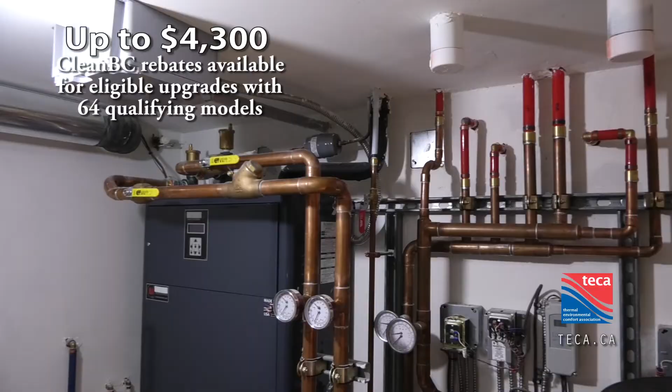Let's talk about money. Everyone likes money. Right off the bat, there are rebates available today for air-to-water heat pumps. In retrofit applications, CleanBC has rebates available. As of March 2021, there are 64 qualifying models here in BC that are eligible for rebates. So I know that's a big selling feature for heat pumps, and it applies to air-to-water as well.

So let's talk about hydronics. What is hydronics? Hydronics is heating with hot water. Hot water is the conveyor belt of heat. Why do we use hydronics? Distribution efficiency, ultimately. When it comes down to it, we can move more heat with water than we can with air, and we can move that heat further and more efficiently in smaller spaces. So builders love it - less bulkheads, smaller pipes delivering the same amount of heat as large ducts.

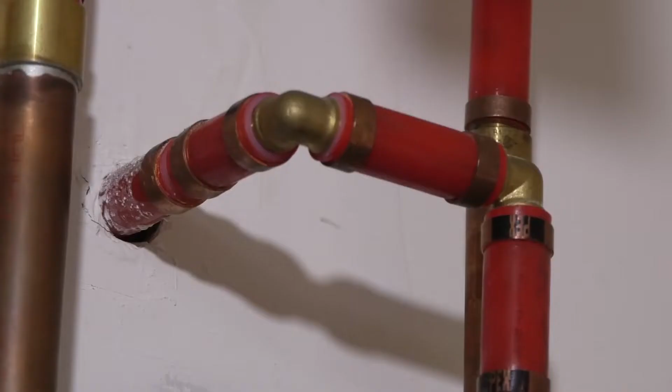Again, hydronic radiant floor heating - that's the predominant way we heat here with hydronics. It's a great match to air-to-water heat pumps.

It matches human comfort profile. We're talking about warm feet, cool head, optimal human comfort. You heat a bunch of air, it goes up and hangs out on the ceiling. I only know one guy who wrote a song about dancing on the ceiling - everyone else is down here. We keep the heat where it needs to be. We can be comfortable when the objects in the room are warm, even at a lower air temperature.

On top of that, hydronics is flexible. We have all types of different heat emitters. Radiant floor isn't where it ends - we've got radiant walls, radiant ceilings, radiators, fan coils, baseboards, and then other loads like domestic hot water. I'm sure some of you shower, so that's very essential. Then we have snow melt, hot tubs, pools - all these other fun things we can do with hydronics. So it's very scalable, and we can stage different types of heat sources very well into the same distribution systems, whether that's different fuel types or just multiple appliances to deal with different loads.

Radiant floor is virtually silent, very, very popular thing. But I'm not here to sell you on radiant - it's already happening, it's everywhere. But a key difference with air-to-water heat pumps is temperature control. If I can drill one thing home tonight, it's about delivered water temperatures and their effect on capacity and efficiency in a heat pump.

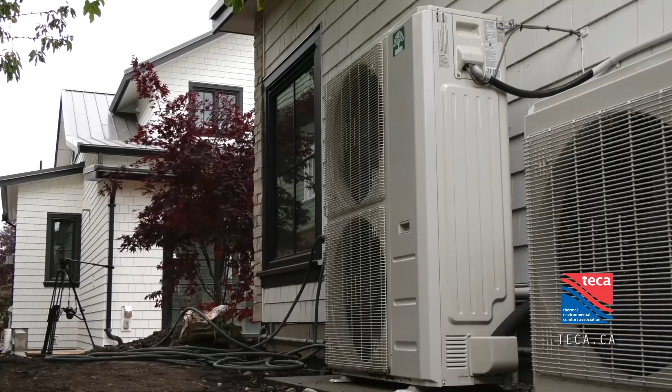We can heat with very low temperatures with radiant floor heating, much lower than anyone would be comfortable with if that was the air temperature coming out of a forced air system. So we have an opportunity to deliver very high efficiencies from our equipment because it's such a low temperature heat distribution medium. So there's a quick slide - some of you guys have probably seen this before.

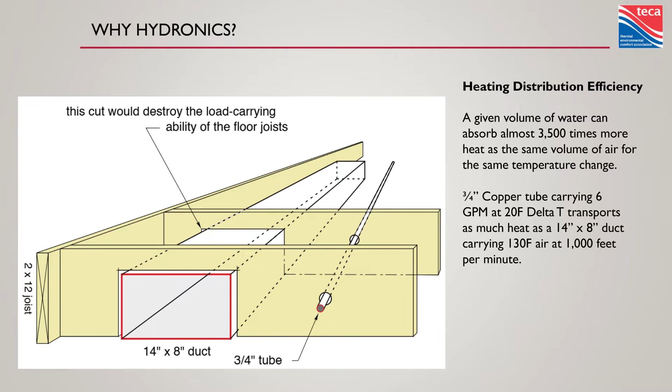3/4 inch copper pipe can replace a 14x8 duct undergoing the same temperature change as far as heat transfer capability. We don't think of air as heavy because we're all swimming in it all the time, but it is. We use a lot of energy to move air around. Typical house, we're talking 3/4 horsepower blower motor versus 1/25 horsepower circulator pump to do the same heat delivery. You take a gas furnace and a gas boiler with the same combustion efficiency, that's neck and neck, but how are we delivering that heat? We can do it much more efficiently with hydronics.

And even those 1/25 horsepower circulators are kind of going by the wayside now with modern ECM pumps. So the technology is advancing rapidly. We're a little behind in North America compared to Europe and Asia, so we can look to them for what they're doing.

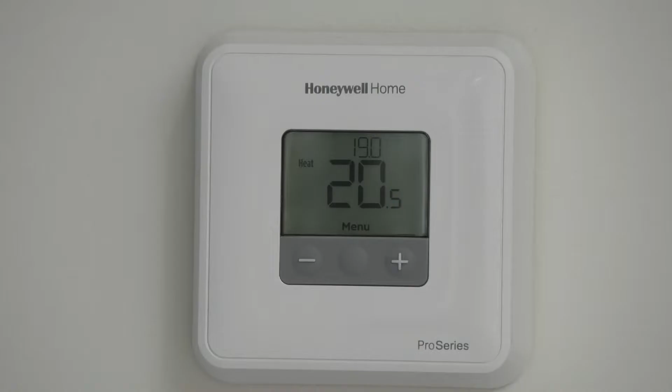Zoning flexibility. Zoning flexibility is very easy in hydronics. We can put thermostats in every room. I like to remind people, you might have a light switch in every room in your house - lights do not consume the kind of power that heating and cooling does, so the ability to zone a system to have independent thermostat control in different rooms is very important to saving energy, to comfort, and is very easy to do with hydronics. It is possible with forced air, but a little more difficult. So another advantage for the hydronics guys.

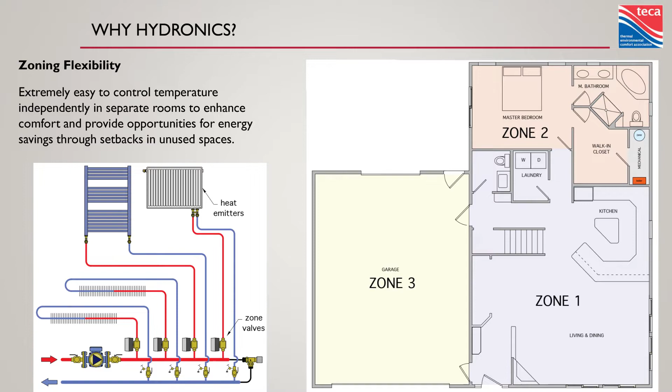But that's hydronics. What about heat pumps? You guys know what a heat pump is?

Pumps heat, as you might think. We're moving thermal energy around. We know that heat goes from hot to cold, so how do we get heat from what's cold into what's hot, like a warm house on a cold day? We just put something colder than the outside air out there, and that's the refrigerant. So we're moving heat from one place to another with a heat pump.

We're not creating heat energy like in a fuel burning appliance. We just boil and condense refrigerant over and over. Every time there's a change of state in a fluid, there's a ton of energy change. So we're taking advantage of that, changing its pressure to change its temperature, to change its state, to move heat. Very fun stuff, even more fun with hand gestures.

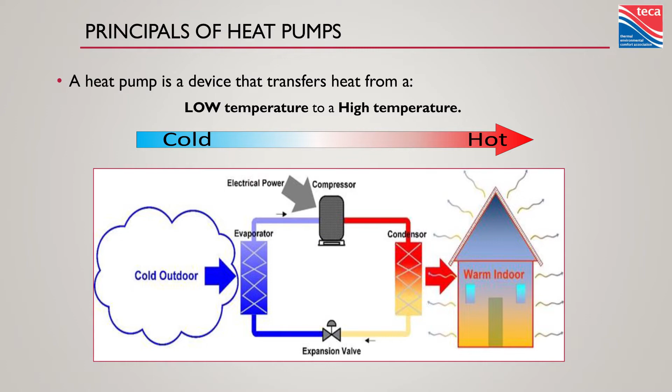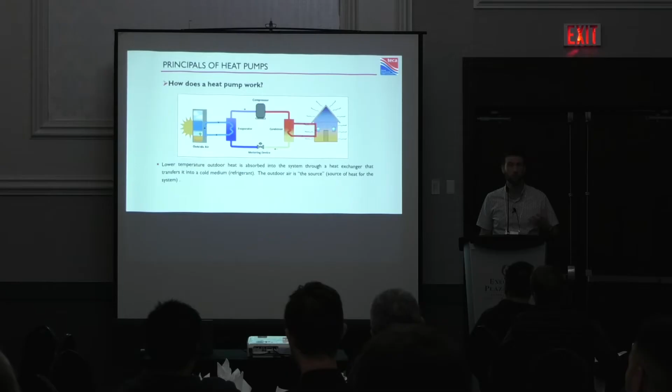So how does it work? It has a compressor. The compressor compresses vapor refrigerant, changing its pressure and temperature. We move it into something called a condenser, where it goes from a vapor into a liquid as it transfers heat into its medium. In the case of an air-to-water heat pump, that medium would be hydronics, so water. It goes through a metering device which changes its pressure again, and some other stuff happens, like an evaporator. An evaporator is where that liquid refrigerant becomes a vapor again and sucks up a bunch of heat.

If you want proof of that, put a pot of water on the stove. It starts boiling, it's taking all of that heat from your stove, sucking up lots of heat energy. That's what's happening here. So we're just moving heat around. All we do is pay to move that refrigerant around in a big circle.

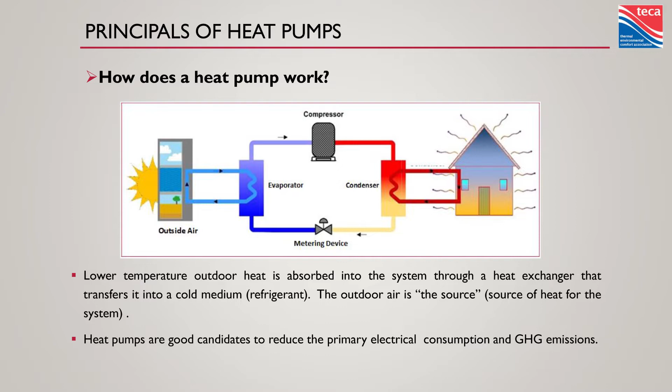Heat of vaporization is important though. When we talk about transferring heat, this is where heat pumps really shine. So who knows what a BTU is? British thermal unit - it's an imperial measurement of heat transfer. 1 BTU raises 1 pound of water 1 degree Fahrenheit, and there's 8.33 pounds in a gallon.

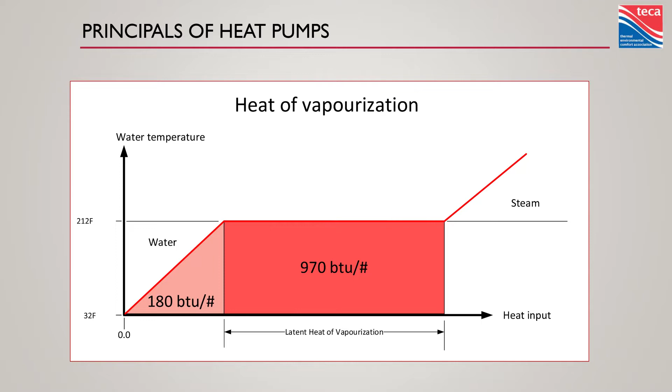So we do all our hydronics math with that. But from freezing to boiling in Fahrenheit, 32 to 212, it's going to take 180 BTUs to get from freezing to boiling. To get that boiling water into steam is going to take another 970 BTUs per pound. So we had 180 BTUs per pound from freezing to boiling, but just to turn that boiling water into steam, a massive amount of energy is exchanged. That's what we're harnessing with heat pumps through the refrigerant.

So everything going into a heat pump has to equal what's coming out of a heat pump. When we measure heat pump efficiencies, we're not talking about percentages of 100% like we do with, say, a gas appliance - we can never get 100% of the potential energy out of that fuel. But in a heat pump, it's always positive in percentages. We measure it in COP, or coefficient of performance. So a COP of 1 is 100% efficient - 1 unit of energy consumed delivers 1 same unit of energy.

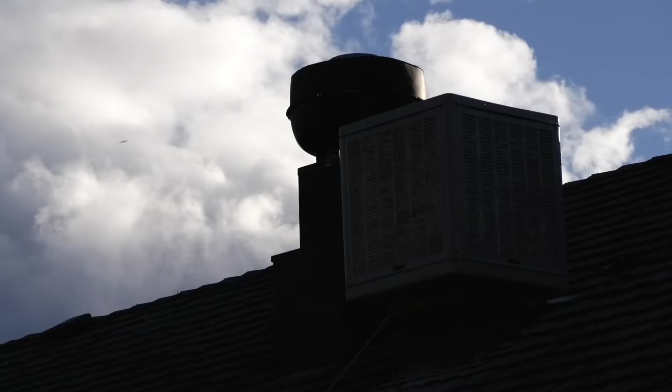So if we use kilowatts, you buy a kilowatt from hydro and you get a kilowatt of heat, 3,412 BTUs. In a heat pump, we're taking most of that heat from the outside air, which came from the sun, warmed up the air - great stuff. Love the sun, huge fan.

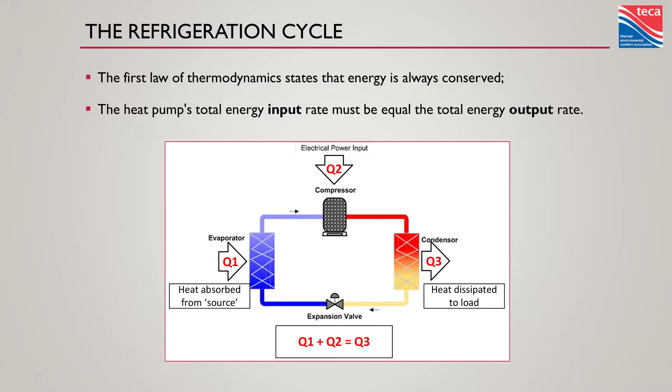The compressor is the thing that we pay to operate - it just moves that heat around. So the heat we deliver is the sum of those two things: the energy going into that compressor and the energy we absorb from the outside air. They're always going to equal each other. So Q1 plus Q2 equals Q3, if you're following the slides.

This isn't a hard and fast rule, every heat pump works like this moment, because these things are dynamic. But a common analogy would be absorbing 24,000 BTUs from the outside air, using 10,000 BTUs of electrical energy to deliver 34,000 BTUs of heat energy. So we only paid for that 10,000, we got 24,000 from outside, we delivered 34,000. That would be 340% efficient, COP at 3.4.

Again, not going to be every heat pump in every moment, but one of the advantages of heat pumps and why we see people focusing on them. We live in a time where the climate is changing and we're looking for ways to cut down on emissions. If we can put everything onto electric heat sources, we can worry about making that electricity efficient later. Let's just get everything on electric as quick as we can.

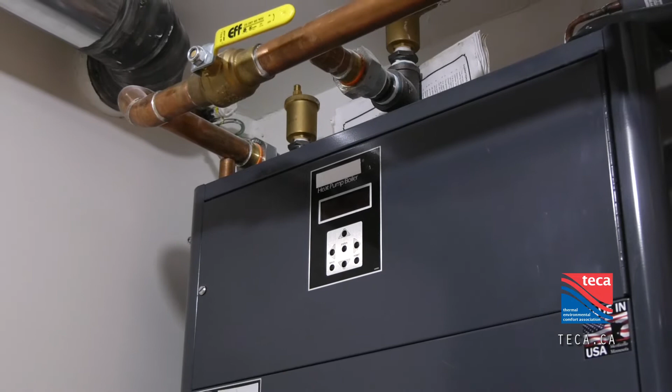Reversible heat pumps describe a certain type of heat pump that can heat and cool. Not all heat pumps can heat and cool. You guys have a heat pump of some kind - it takes heat from inside the fridge and dishes it out behind or under the fridge. It's just moving heat energy. Air conditioners work the same way, it's the exact same principle. A heat pump just heats the house, an air conditioner cools the house. A reversible heat pump can do both.

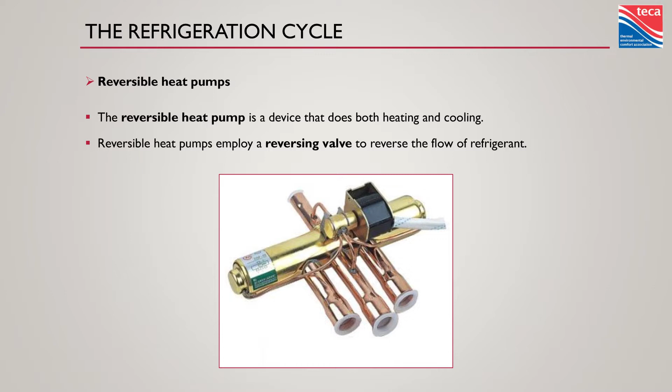It uses a reversing valve. All the reversing valve does is change the direction of flow after it leaves the compressor. Simple stuff, not going to get too far into it, but it leaves the compressor, goes through the reversing valve, takes a left or a right - are we heating or are we cooling with that energy?

But these are excellent candidates for cooling as well. We don't think of hydronics and cooling a lot, but we can. We can use chilled water to move thermal energy out of a building, and it's again high distribution efficiency, just like our radiant floor heating is. It's just hydronics - instead of heated water, it's chilled water.

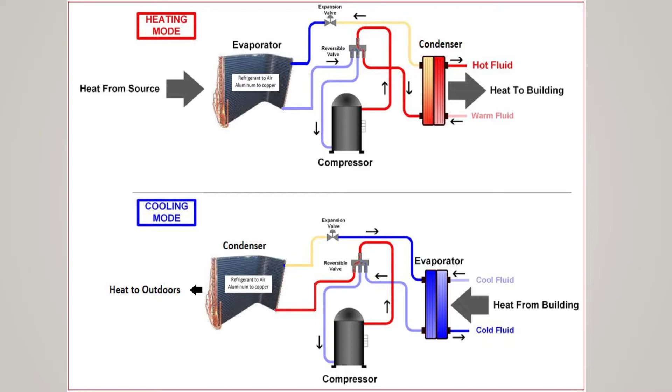We have a few different categories of heat pumps out there you guys may or may not have seen. There's air, there's water - we say it in different orders, and believe it or not, that matters. So I just want to clarify a few things here. There are air source heat pumps and there are water source heat pumps. Air source heat pumps exchange energy with the air, water source heat pumps exchange energy with water.

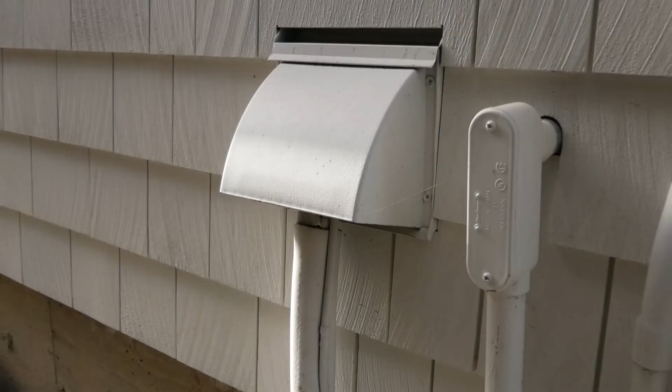That's the first word. The second word is how we deliver that heat energy. So we have air-to-air heat pumps, probably the most prevalent we're familiar with - air source heat pump outside using forced air heat delivery inside. Air to water, the only difference is hydronic heat delivery inside, still air source heat pump. Then we have water to air, not to be confused with air to water - that's a water source heat pump using forced air. And then water to water is a water source heat pump using hydronics to distribute that heat energy.

So when we get into air to water heat pumps, we have subcategories. Monobloc is kind of a European name, but it's stuck. It is a packaged unit - for those HVAC folks in the room, like rooftop units, the refrigeration's already self-contained, you just hook up some ductwork. Same idea here, hook up some water lines, heating and cooling comes out. The thing with monobloc heat pumps is if you're a gas fitter or plumber, this is probably right up your alley because you're already doing the plumbing side of things. You don't need a refrigeration contractor involved to run line sets or charge it - it comes factory charged, ready to go.

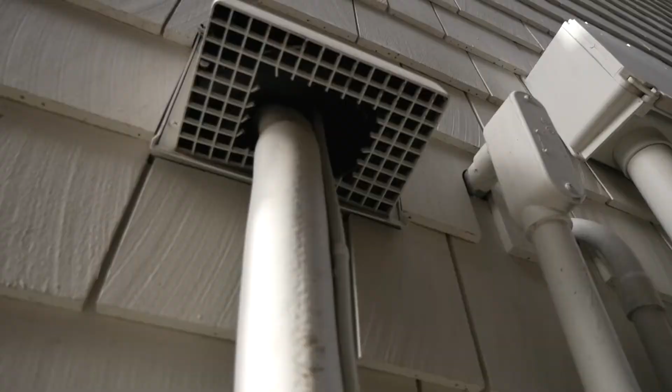But we have water lines outside now, and believe it or not, it gets cold everywhere at some point in the year, and that water can freeze. So the key part with any monobloc heat pump is glycol - we're going to have to use glycol in these things to protect them from freezing. Glycol does one thing really well, it doesn't freeze. So you can count on that, but glycol also impacts water flow and pressure drop. So there's some key things to understand about sizing pipes and sizing pumps once you've added glycol.

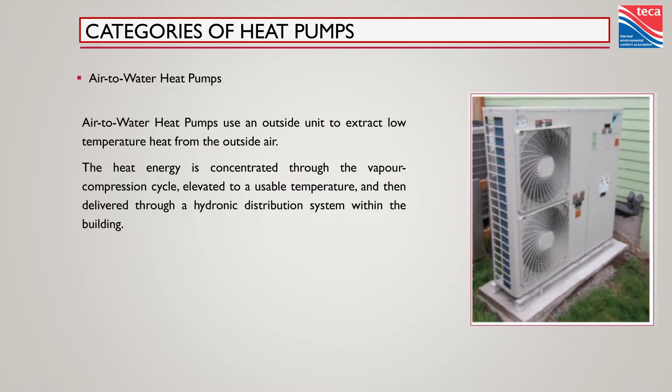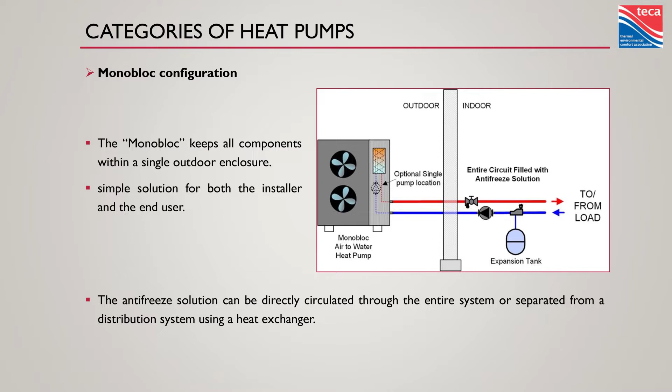We live in a pretty mild climate here where a lot of people get away with hydronic heating with 100% water. As soon as you run those water lines outside, glycol is now your friend. So you might have to educate yourself a little bit on how it works, how to add it, how to verify how much is in there, but it's a key part of any monobloc heat pump. So here's a classic piping diagram - heat pump sits outside the house, water lines come through the building into the mechanical room, and are distributed through the building from there.

Sometimes people don't like paying for glycol, so they like to isolate a small subsection of the hydronic system to just put glycol in that part and leave 100% water everywhere else. It can be done. You'd use a fluid-to-fluid heat exchanger to do it, but you also have to be careful with that. To transfer heat, water to water needs a difference in temperature. So if I had a system that needed 120 degrees Fahrenheit on a design day to heat it...

Now I've put another heat transfer spot between the heat source and the load, well, now I'm running my heat pump even hotter to deliver that 120 on the load side. So that heat exchanger, if you've sized it correctly, is probably going to be pretty expensive. It's going to need a lot of surface area to transfer heat at a fairly low delta T. Plus you're going to need another air separator, another expansion tank, another relief valve, some more makeup water, the list goes on. It may not save you as much money in glycol as you think, but it is going to make your heat pump less efficient every day of its life. So be careful with these systems, select your heat exchangers carefully.

Then we have our split heat pumps. So split heat pumps are what we're most familiar with in the air-to-air side of the business. Air source heat pump outside, refrigerant lines bringing that refrigerant into a wall-mounted or floor-mounted indoor unit where it goes refrigerant to water. Sometimes we call that a hydro box, depending on the brand. But the wall-hung ones really aren't that unfamiliar to us. It's almost like hanging a boiler on the wall. There's just no venting off of it.

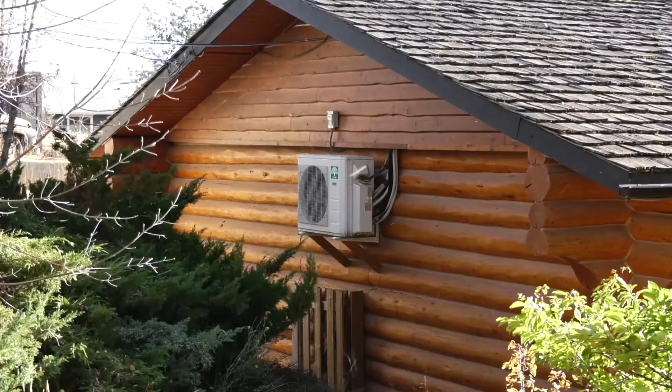What's nice about the monoblock is you don't have something in the mechanical room, so if you have a tight mechanical room, this might be the best fit for you. You know, move some of that equipment outside. On the other side of things, this is going to have a smaller outdoor unit. I don't know any homeowners who say, could you please make that thing outside my house bigger? So splitting all those essential components into two can save some of that mass outside.

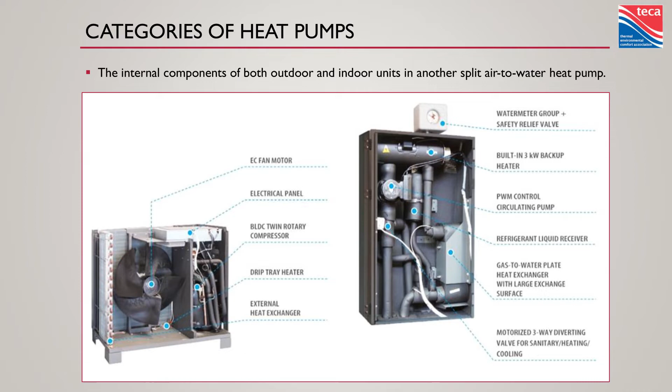Now, typical components in these things, we have a fan on the outdoor unit that's going to move that air across that heat exchanger. We have the heat exchanger itself, the compressor. Most of the refrigeration components are going to be in the outdoor section in these split heat pumps. In the indoor unit, you've got the other heat exchanger, refrigerant to water, sometimes a circulator pump, sometimes some electric elements for auxiliary heating. Flow switch, almost always, because proving flow is essential before we run that compressor. And other typical safeties we would think of, relief valves, auto vents, those kind of things in any kind of heat source.

And there's also a variation of the split ones that's common where the compressor's on the indoor unit. We've seen this with a Canadian manufacturer that puts the compressor on the indoor unit, so it's just a fan and a heat exchanger outside. Whether that means you're moving noise that's outside to inside is another debate, but nonetheless, they're out there, they're available. Another tool for the tool belt.

So glycol. Glycol means that you're going to have to increase your flow rates because glycol transfers less heat than water does. And it means you're going to have to increase the size of your pumps because it's significantly more viscous than water. So you're dealing with higher pressure drops. On top of that, heat pumps want to move more water than we're used to. We've kind of come to this agreement now that forced air systems, if you go from an oil furnace to an air-to-air heat pump, I hope you're adding duct runs.

We've accepted that we're dealing with a little less temperature rise for a higher volume of flow. I don't care if it's CFM or GPM, the exact same thing applies in air-to-water heat pumps. We're moving more flow to transfer the same amount of heat, just with a shorter temperature rise.

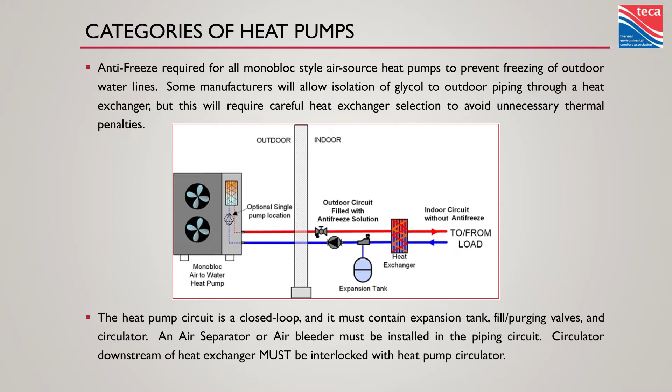That's critical to understand because people get into a habit where I'm hanging a 50,000 BTU boiler on the wall, I can run this in this size piping and use this size pump. Then you start talking heat pumps and glycol, and you're going to have a system that won't last as long as its warranty.

On top of that, you're crippling its capacity and crippling its efficiency. Buffer tanks are another key ingredient in a successful hydronic heat pump application.

When we're dealing with a forced air heating system, we probably aren't zoning it very much. If we are, it's maybe 2, 3, 4 zones max on a central ducted system, so maybe a quarter of the total load. I've seen houses with 60 hydronic zones in them. It's insane, we're dealing with tiny micro loads.

The other problem is the heat pump is so effective when the temperature is mild that there's so much heat energy it's generating when there's almost no load. We are going to short cycle that thing without a way of storing thermal energy.

The thing about a conveyor belt of heat energy is it's not just putting heat into water—that water has to get rid of that heat somewhere. So you can't just warm up the water, it helps to store it. Think of a buffer tank like a thermal battery. It warms up, the heat pump turns off, and that essentially becomes your heat source for the rest of that cycle.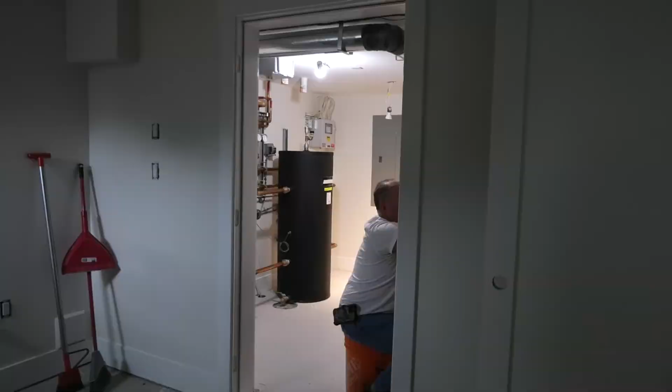You can now deliver heat to your various heat emitters from that buffer tank while the heat pump is just taking a break. Then when the buffer tank temperature has dropped by a predefined amount, the heat pump comes back on and just warms it back up again. So you get some nice long cycle lengths.

I don't know how much you guys know about compressors, but they do not like short cycling. Gas appliances don't like it, electric appliances don't like it, compressors hate it. If we can keep them running long, we keep those compressors properly lubricated with oil, we keep the lock rotor amperage draws to a minimum, thermal stress to the wiring to a minimum, and we get a nice efficient system. Buffer tanks are key to that, but they create more challenges if we're not used to working with them.

I've used buffer tanks in non-heat pump applications plenty of times. They are a way of storing energy, but you also have to understand what it's doing to your system. So there's a few different ways to pipe a buffer tank that are pretty important.

This is a 3-port buffer tank configuration, where our heat source is transferring heat into the buffer tank and taking fluid from the buffer tank to be reheated. We keep the hottest water at the top and coolest water on the bottom, because that's where they want to hang out—buoyancy, it's a thing, we can't fight it. Keeps those hot air balloon guys up in the sky, they love their jobs.

On the load side, we're actually taking the water right off the supply of the heat pump before it touches that buffer tank. That's important for low mass heat emitters. We've got all kinds of different heat emitters in hydronics—your big slabs full of concrete, what we call thermal mass. Thermal mass is all that energy we can charge into the slab and then just let release for a long period of time, great for limiting cycling on a heat pump.

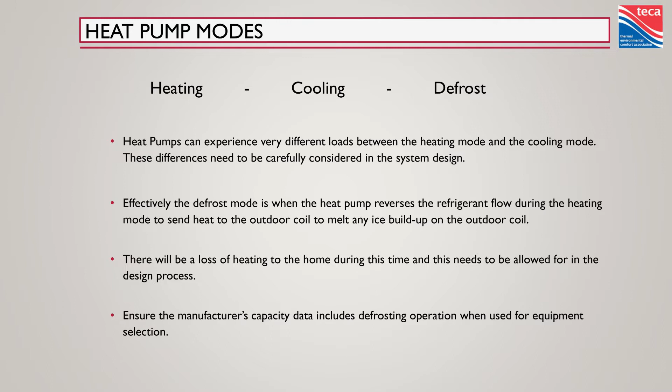We're not trying to pump heat out of the space, we're actually just trying to melt the ice that's right on that coil. But when it does that, there's two things to remember. One, that water's got to go somewhere, so hopefully it's not running across a pathway and refreezing, creating a slipping hazard. Think about that when you place your heat pump. But also, as it reaches the end of a defrost cycle, some of that water is going to vaporize, turn into steam.

I have more stories than I have fingers to count them on of homeowners thinking their heat pump is on fire and calling the fire department.

So make sure that you're talking to your clients about this. Tell them this is normal, it's something to understand that is going to happen. In fact, the more efficient the heat pump, probably the quicker it's going to frost up. It's a good thing — look at how good a job it's doing of taking heat out of that air. It froze, it's great, it's not a bad thing. Just hopefully it does it quickly.

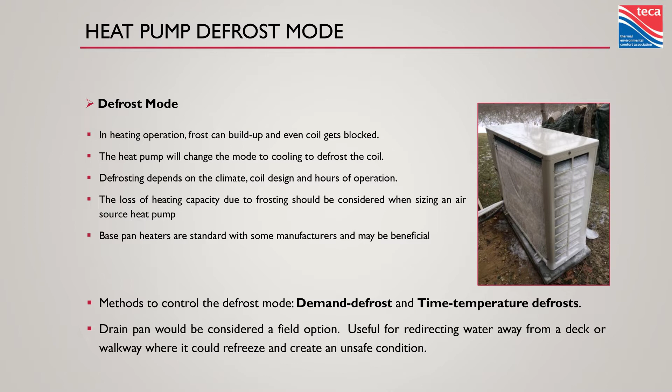So it looks like that — you might not have snow on the ground, but you got ice on the heat pump. Hopefully it terminates quick, there's a few different modes for that. Try not to do some things. You know, sometimes you gotta poke some fun.

Air source heat pumps get their heat from the outside air or reject their heat to the outside air, so make sure it's fresh air all the time. Don't put it in a confined space where it's going to recycle the same air over and over again — you're just going to start going down a rabbit hole you'll never come back out of. You want to avoid having one heat pump blowing its air into another heat pump, because you've already taken heat out of that air; that next one's going to have a tougher job.

You want to make sure that you avoid placing these things where they're going to get snow landing on them, or if they're cooling the house, you don't want a hot air vent pointing at them. But a real key thing is to make sure there's no obstruction in front of the discharge, whether that's a side discharge heat pump or a top discharge heat pump — free and clear of anything that's going to impede airflow.

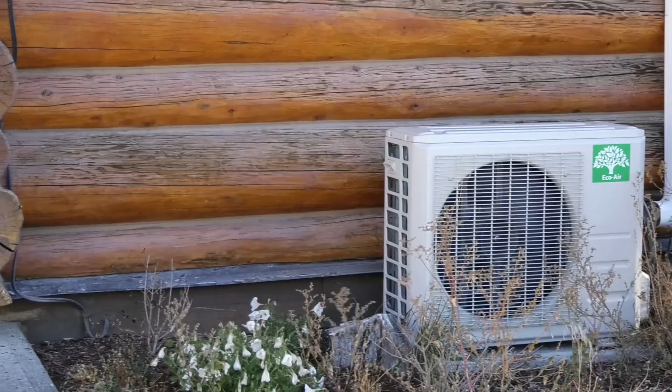But you do want to minimize your pipe lengths, whether it's hydronic piping or refrigeration piping, and the bends in that. You want to make sure these things are above the anticipated snow line so they're not just buried in a drift of snow. And you want to leave them access for service—not every service tech is as svelte as I am, so you need to plan for that guy who needs to crouch next to it and get that compressor out of there.

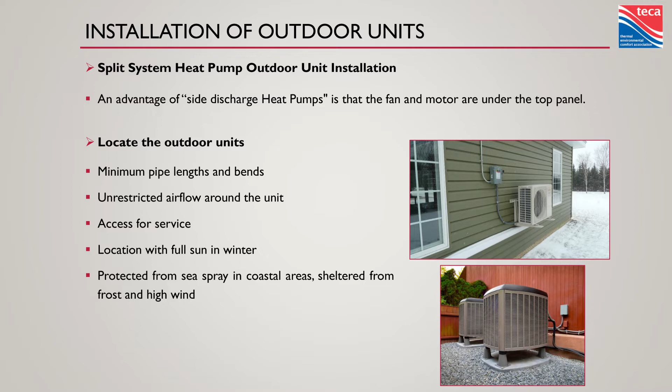Also want to maybe protect it from frost or sea spray off the ocean. There's some great waterfront properties around here, but that salt air is not so great for fan rotors, fins, and all these other things, so protect it from that. I've seen some heat pumps with beautiful water views, but unfortunately they didn't last.

You want to avoid noise disturbance, so don't put this thing right outside the primary bedroom—maybe put it somewhere that no one's going to really notice. They are not silent. They're getting better, but they're not silent. Choose a quiet product—if you're trying to keep it quiet, start quiet. Think about noise: it doesn't get any quieter than at the source.

It's pretty typical to need somewhere around 3, even 5 feet off the front of a side discharge heat pump, or off the top of a top discharge heat pump. So a top discharge heat pump under a deck is not a great idea, but a side discharge could maybe live under a deck, rejecting heat to the outside or absorbing heat from the outside.

Try not to put these things right in front of the front door. I don't know if you like the people that canvass your neighborhood, but if it's a cold day, it's even colder air coming off of that heat pump. It's not a warm greeting to your friends and family.

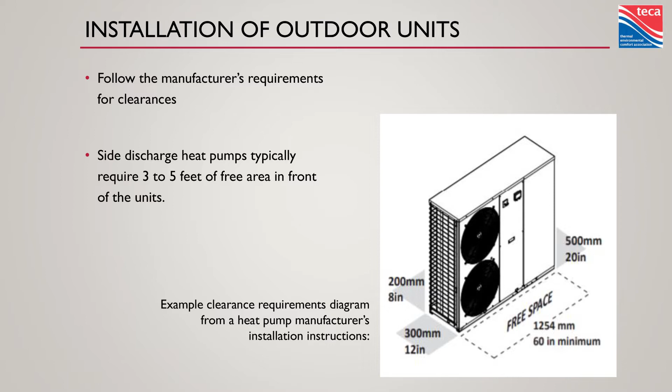And we have penetrations through the building we need to seal. Slope them towards the outside, make sure they're airtight, make sure that they're watertight. There's all kinds of accessories out there for this industry to make sure that these things are done cleanly and nicely. Don't just drill a hole and slam some pipe through it, please. There's some great products out there to clean this up, or just some common sense.

Now let's talk about thermal performance—some things that affect the efficiency of a heat pump. Outdoor air temperature is a huge one for an air source heat pump; that's where we're getting our heat energy. So the warmer it is, the more heat energy there is, which really makes pinning down the efficiency of a heat pump like a dart on a wall.

You can't pin it because it's a momentary measurement. Our load side, water supply temperature—so the more temperature lift we're trying to get from the heat pump, the harder it has to work, the less efficient, and the less capacity.

So what comes out of this—I already see a lot of people doing great low temperature hydronic heat emitter designs, because condensing boilers work great at lower return temperatures. That's how we condense those flue gases, another latent heat exchange. But with heat pumps, there's an even more drastic efficiency change with leaving water temperature.

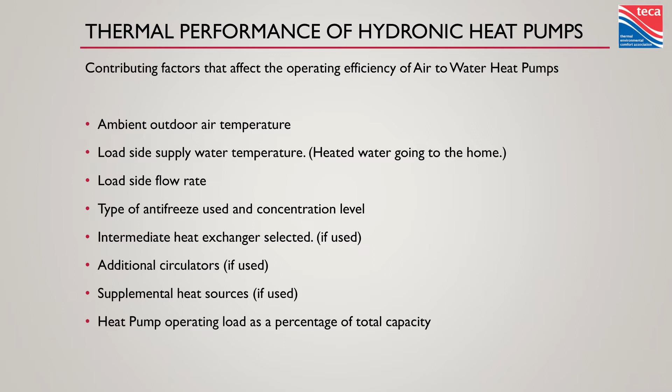And things like adding antifreeze—try not to use more than you need. Try not to use bigger circulators than you need. Just typical things that are all going to lead to the difference between a system that's very effective and very serviceable, versus something that looked cool on paper but just slugs through energy like no one's business.

So COP, I already covered this—wattage out, wattage in, we get more out than we put in. Good job, everybody. So COP is how we measure these things.

You can measure it quite easily. If you know what's coming out of that hydronic system through temperature difference and flow rate, you can calculate BTUs—now you know how much you're delivering. Simple to do with a couple of thermometers, or even some PT ports and some gauges you bring yourself. Now you've got your delta T. If you've got a pump curve and a couple of pressure gauges, you can use that to calculate your flow rate.

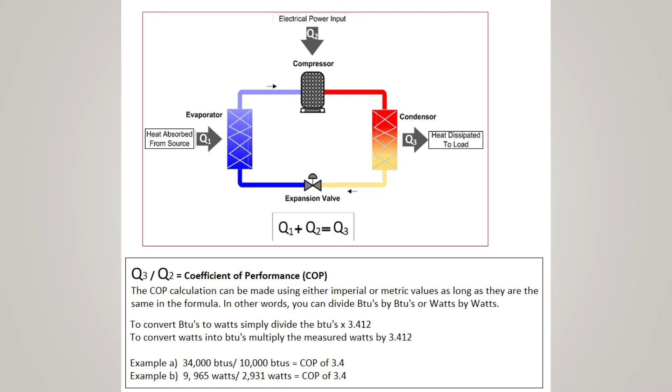So you now know what you're delivering. Grab your amp meter, put it on the compressor, grab your voltmeter, measure the ingoing voltage, and now you can figure out how much energy is being consumed. You right there with a couple gauges and one relatively inexpensive multimeter can now calculate the efficiency of these things.

So it's great to do when you install them to set a benchmark. Make sure you haven't missed something, but also know how it was performing when you left it, so when you come back to check on it, you know if things have varied. It's also a good point to figure out if you need to change a balancing valve or change a pump speed or something like that.

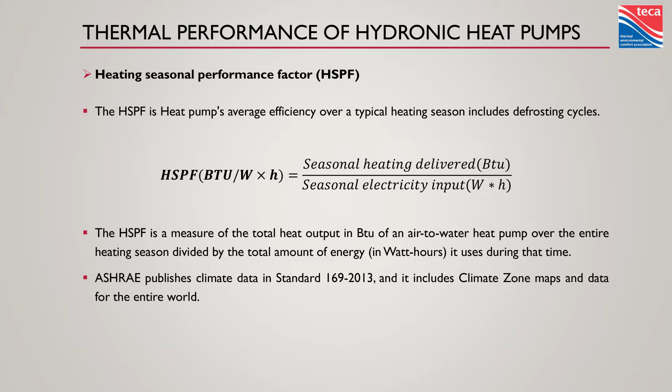Something about air source heat pumps that I hear a lot of people talk about is, oh, they suck in the winter, they just don't do a good job. A lot of people, especially in the forced air industry, use gas or electric as a backup, and when that comes in, in a lot of cases the heat pump turns off completely. It no longer has enough capacity to heat the house, so off it goes, on comes the backup, and up goes the hydro bill. So what's nice about hydronics is we can use them in conjunction.

But I want to point out just how little of the year we operate at design conditions. We're standing here in the greater Vancouver area. This is some bin temperature data from the city of Vancouver. Bin temperature data is basically saying how many hours in a year do we spend in a certain bin or range of outdoor temperatures. So we drop these into 5-degree ranges or bins, and on average 3 hours a year at design conditions. Meanwhile, the bulk of our run hours are right in the middle, right where we're dealing with partial load conditions where these heat pump efficiencies are much, much higher.

So we need to make sure we cover the design load, but we don't necessarily have to do that with a 100% heat pump. We can do that with a heat pump that covers most of the partial load conditions, and use something less efficient like electric resistance as the added capacity for those coldest days, because they're brief. At our design temperature, when we're at 100% of design, that's 0.03% of the actual heating season, so 3 hours roughly.

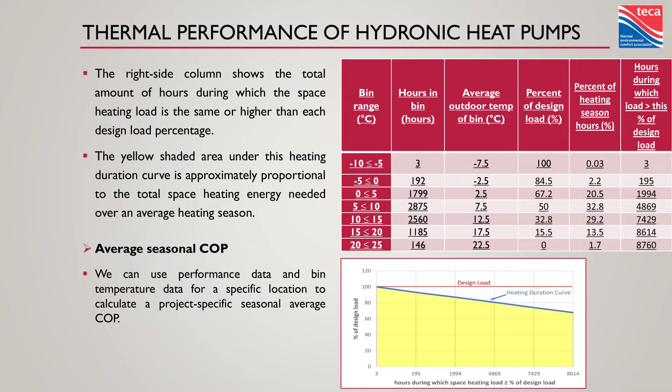Meanwhile, 32% to 67% of the load, these three sections here, represent a large chunk of the heating season. So just remember that when you're selecting your heat pumps. You don't have to find a heat pump that's going to cover 100% of that design load. If you do, you're probably going to end up with a pretty big buffer tank if you did your math right as well. Now, our efficiency goes up as the outdoor air temperature goes up.

Great thing, we've got more heat energy there. It also goes up as the leaving water temperature goes down. So if I can heat with lower temperatures, I gain more efficiency with that too. So if you guys aren't familiar with a concept called outdoor reset, it's a huge benefit with hydronic heat pumps. As it gets milder out, we can heat with lower and lower temperatures, and that's got a doubling effect because not only is the heat pump working more efficiently because it's warmer out, it can operate more efficiently at those lower temperatures we can still heat with.

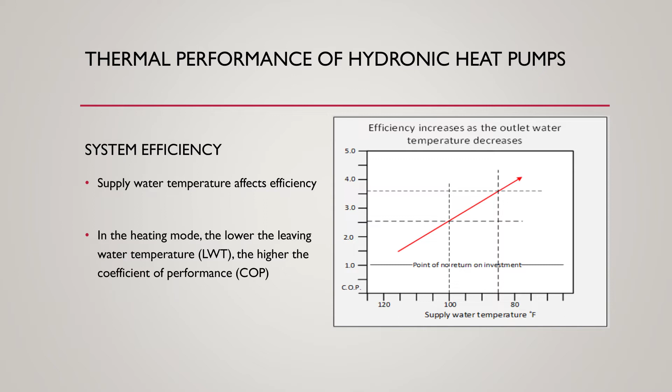And then flow rate also affects efficiency. Not by as much, but it's still important. The big thing with flow rate is if you don't have enough, you're going to start damaging your heat pump. Overpressurize the refrigeration circuit, or low suction pressure when you're cooling.

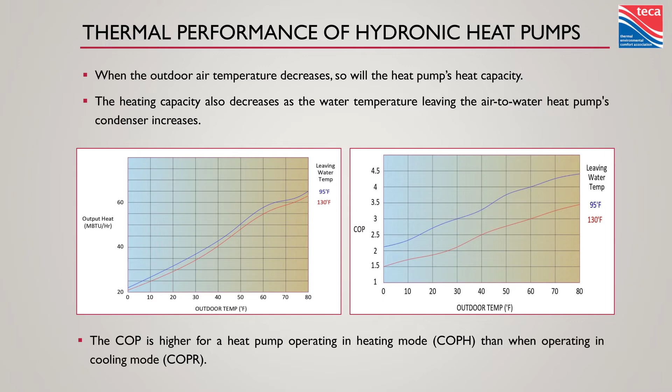Let's talk flow rates. 2.5 to 3 gallons a minute per ton is typically what you're going to see. Now, ultimately, check with the manufacturer specs for the heat pump you're looking for, but this is 2.5 to 3 gallons per minute per ton. So if you're doing the math, that's 2 to 3 times the flow you're used to for gas and electric boilers. Bigger pipes, bigger pumps, plan for it. If you don't have that kind of flow through it, especially with inverter heat pumps, they're going to protect themselves and ramp down and never even run to full capacity.

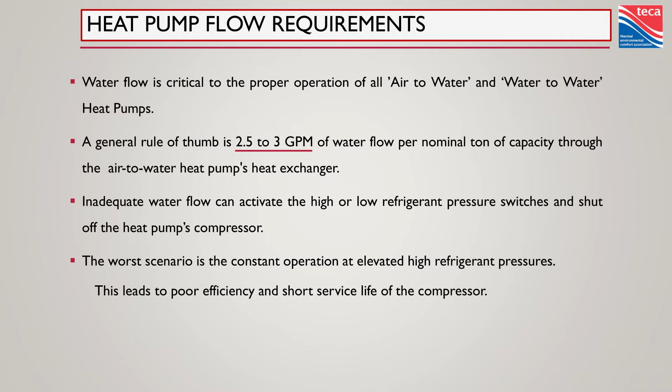Inadequate water flow has a detrimental effect, and we can ultimately destroy the equipment if we run it with too low of water flow for too long.

So let's talk buffer tanks again for a minute. This is a 4-port buffer tank. The 4-port buffer tank method is very popular. It's very easy to achieve hydraulic separation.

For those that don't know what hydraulic separation is, it's a way of combining two separate circuits in a hydronic system so they don't influence flow within each other. So a change in flow on my load side does not represent any change in pressure drop on my source side, which means my flow rate stays consistent no matter what's happening on the load side.

You can do this with closely spaced tees, you can do it with low loss headers, you can also do it with 4-port buffer tanks. Buffer tanks have very little pressure drop because it's a very low velocity through them. Great big chamber, low flow rate comparatively. So that acts like a low loss header.

On this side we have our primary circuit where our heat source is just interacting with the buffer tank, and on the load side we've got our secondary circuit drawing heat away from the buffer tank. As far as we're concerned, after that buffer tank, everything is back to normal. Keep it low temperature, but you don't have to change how you're dealing with flow rates and things. It's just on the primary loop that you need to deal with these higher flow rates.

So normal design parameters, higher flow rates than your typical boilers. If we do primary, secondary piping, we're going to have some successful systems because we can make sure those heat pumps get the flow they want.

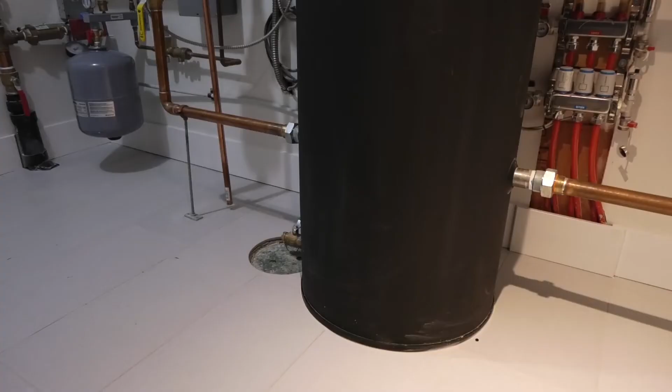Some of the most challenging, I'll nicely say, air-to-water heat pump systems I've been involved with were ones that were direct piped, where we were trying to get the kind of flow rates through the heat pump that they needed through the entire system. It wasn't designed for that.

We're used to 10 or 20 degree delta T's in our radiant floor panels and things like that. We're dealing with like 3 to 9 degree delta T's on our heat pumps here. We're just not sizing our heat emitters that way. We're not sizing our pipes that way, and we don't have to. We can still transfer the same amount of heat from one circuit to the other.

High flow, low delta T meets low flow, high delta T. BTUs still transfer. So decoupling it, very important. 4-port buffer tank, very easy way to achieve hydraulic separation. So very popular for that reason.

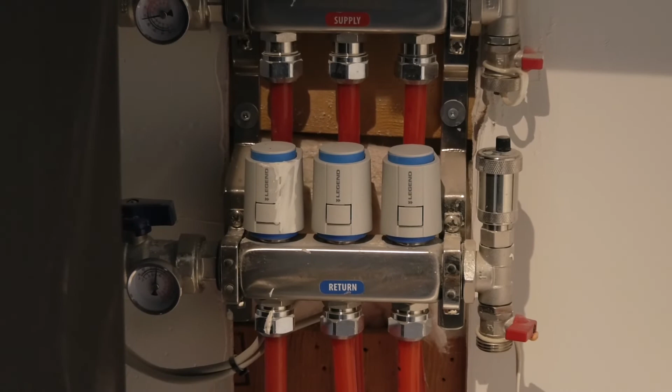But that buffer tank is interacting with the load at all times. So if this thing has been turned off while I was away vacationing and I come home and I turn on my heating system, all that water has to be warmed before any of that heated water gets out to those heat emitters to start heating the house, which slows the system down. If we're dealing with a thick floor slab that takes 8 hours to respond anyway, no one's going to notice. But if that's a fan coil, a panel rad, they are going to notice.

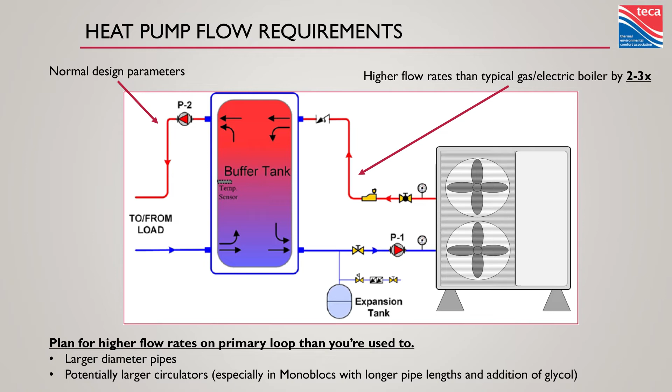That's where we use things like 3-port and 2-port buffer tank strategies. Now let's just get right down to it. I picked 2 products on the market. I may or may not sell them. That's not why they're there. The point is, one is a gas boiler and one is an air-to-water heat pump, and they're about the same capacity. So around 50,000 BTUs.

It's rated at 52,886 BTUs with an 86 degree leaving water temperature when it's 23 Fahrenheit outside. So we can only really pick a set of numbers to give it a number, but that's the range. Meanwhile, we've got a gas boiler that gives us between 8,000 and 55,000 regardless of the weather. So we need to start thinking about things like balance point charts when we're sizing our equipment. I've got some slides to show you what that means. We really need to understand the relationship between the heat source and the load as the outdoor temperature changes.

A couple other distinctions here. Well, that air-to-water heat pump can cool, the boiler cannot, so that's a thing.

Flow rate: 15.4 gallons per minute, that's a 6.9 degree delta T. What's the boiler want? 5.1. Same BTUs, roughly 50,000 BTUs each of these appliances. So if you were sizing that for a 20 degree delta T with 100% water, that could be a 3/4 inch copper pipe. The other one's going to need 1.25 inches minimum. Those are minimum sizes, and we haven't even started adding glycol or distance. So that right there is the first step in properly applying these products.

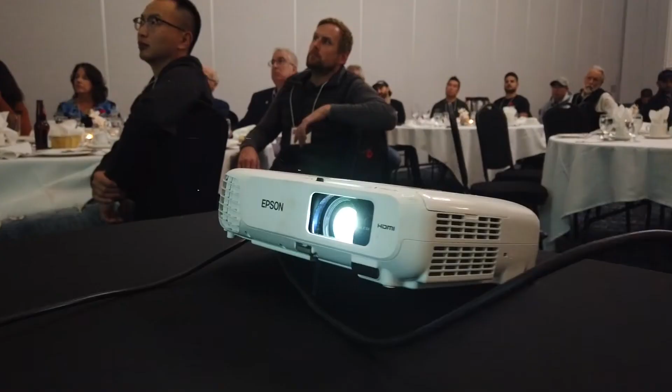Operating temperature range. In heating mode, this thing can create heat anywhere from -4 Fahrenheit to 95 Fahrenheit outside. The boiler doesn't care. Something else to think about: I know it doesn't get above 95 that often, but if you want to do domestic hot water off of your air-to-water heat pump and you live somewhere where that's going to be a problem, you're going to need to plan for some summer domestic hot water.

Or if you're doing chilled water cooling with your system, you're going to need to figure out which one's going to take priority in summer, because trust me, people that don't have hot water and don't have air conditioning when they need it are the most irate customers you can deal with.

Lastly, supply temperature range. Both start at about 77 Fahrenheit. We can do a lot of heating at 77 Fahrenheit in hydronics. The boiler goes all the way up to 194. Great job—if it's actually boiling, you're doing it wrong. But the heat pump, 131 max, downhill with a tailwind. It does not get any hotter than that. That's based on R410A, and that's just a limitation of that.

So this has a real hard line in the sand of where it can work and where it can't. You're dealing with an atmospheric boiler and some fin tube baseboard that needs a high delta T to get that convecting heat. That heat pump is not a good fit for that. You are going to have more baseboard in that space than you are comfortable with to make that effective. So you're either adding more surface area to your heat emitters to get them to low temperatures, or you're stuck in the electric boiler world, unfortunately. But there are some real limits there, and at 131 we have lost a lot of capacity and a lot of efficiency. So don't design for those maximums.

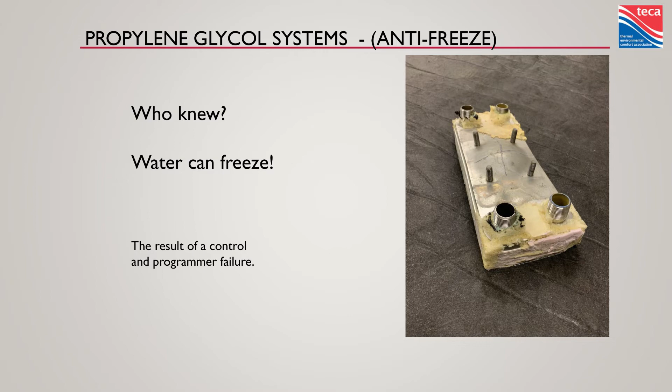Glycol has freezing points and bursting points. When you're selecting your glycol, bursting is not the one you're looking at. It is freezing. Once the water is frozen, it doesn't move around very well. I don't care that the pipe didn't break—we can't transfer heat through a slushy.

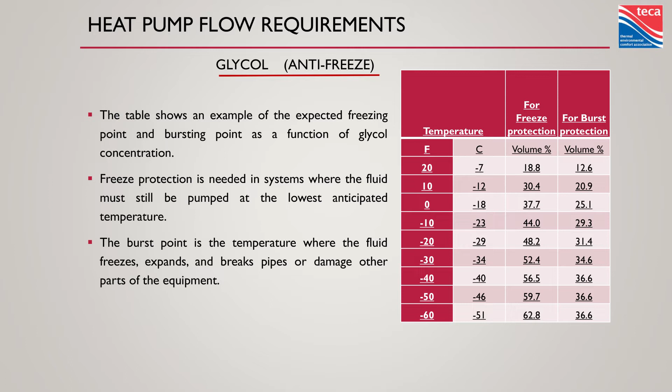Look at the freeze protection numbers, and you're usually going to be in that 20 to 30% range depending on where you're installing it, but less is more. Make sure you're protected for the application, but don't just throw as much glycol as you can in there, because there's a massive effect on pressure drop and flow rate, as I mentioned before.

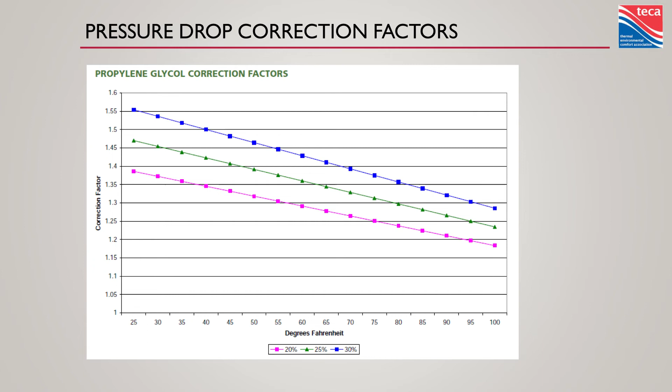Pressure drop is a much bigger one. That same 20% blended glycol at a 55-degree temperature outside is about 30% more pressure drop than 100% water. So you're going to want to make sure you're following these charts and going through to make sure your pump has been selected for these parameters, and your heat pump's going to get the flow it needs to have a nice long life. An important thing to know about sizing glycol is how much fluid is in the system.

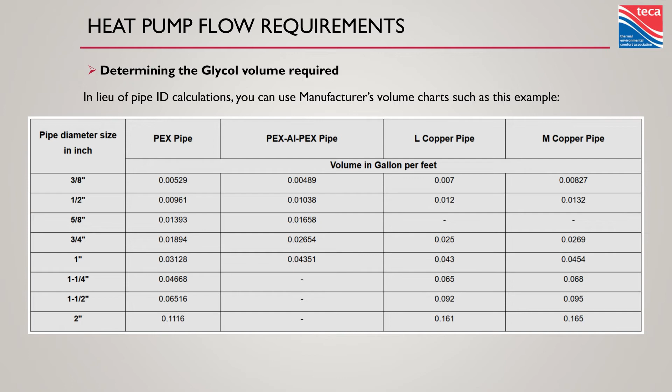So you're going to need to add it all up. There's some software that can make it easier, or that's what they made apprentices for. Count up all the piping in the system, figure out how big it is, figure out how much volume's in there, and it's just a percentage of that. You don't usually buy glycol in 100% format, so then you apply the percentage that you're buying it in to figure out how much you need to buy.

Usually it's 95% or 50-50. I try to buy more glycol than water because I don't like shipping water in buckets and paying someone to do that, but you never buy it 100%. So we've got some formulas in our workbook to figure out exactly how much glycol you're going to need to buy from your supplier.

So what happens if we don't have enough water flow? As I mentioned before, when we're in heating mode, pressures go up in the refrigeration circuit. We can't dissipate that heat. Things climb and climb, things shut down to protect themselves. When it's cooling, our suction pressure starts dropping and dropping. Again, bad thing - we want to make sure we have ample flow through these systems.

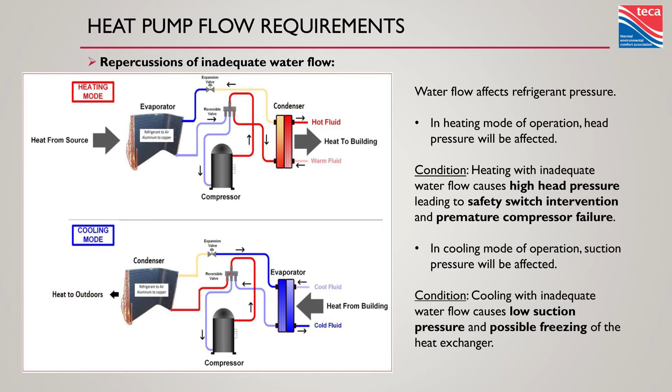We want to use fan coils to cool because they have drain pans. Big part of human comfort when we are cooling is dehumidifying. If we're too warm, we sweat. Sweat doesn't work so well when the air is wet, so we need to drop that humidity to be comfortable. We can be comfortable at a higher temperature if the humidity is lower.

If we're just doing radiant cooling, that is running chilled water through the floor, there's some limits to how much cooling we can do based on the dew point. The dew point gets calculated by surface temperature and humidity, and we can control one of those. And the other one, well, we live in a rainforest.

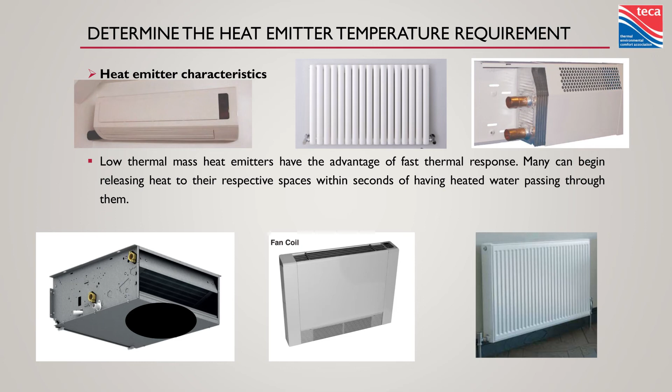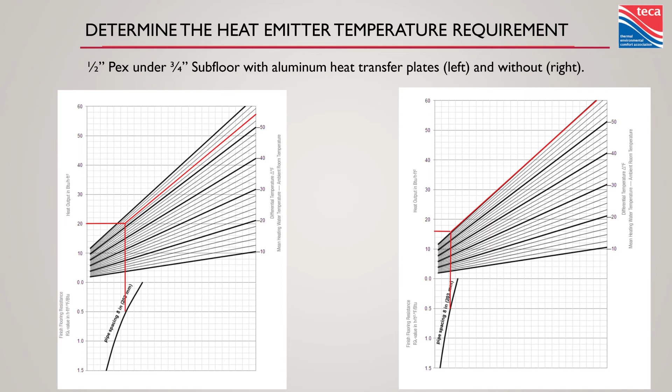Pop over to the heat transfer plates: I can drop that down to a 55 degree delta T and get 20 BTU a square foot out of it. So, lowering that water temperature or increasing your heat output, however you want to look at it, these things have a great place in these kinds of systems.

So make sure you're sizing a system based on that water temperature. The capacity of the heat pump changes as the water temperature changes. So you start with a heat loss calculation, figure out what you have in room-by-room loads, figure out how you're going to address those with your heat emitters and what water temperature they're going to need, and then you can start to pick your heat pump—because the capacity of that heat pump is going to change based on that water temperature.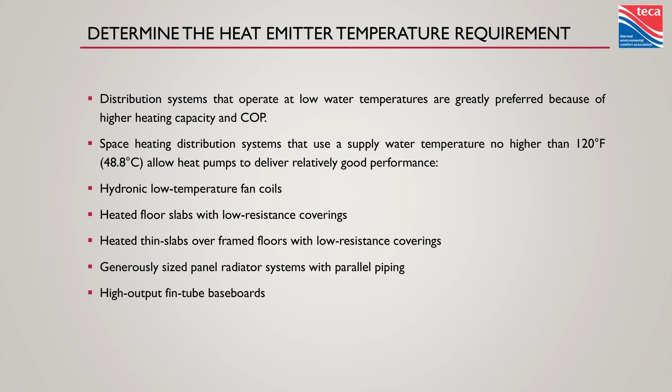So if we're talking radiant floor heating, more pipe. I don't sell pipe—there are some nice people here who do. This is not a pitch for pipe, but it's the cheapest thing in the whole system. Put more in and you can increase those surface temperatures with the same water temperature, or to say it another way, lower that water temperature to get the same output.

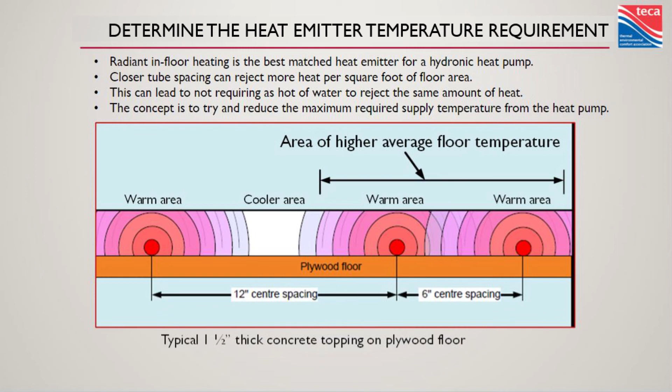To the left, pretty typical standard practice is 12-inch on center spacing. We've got our PEX, we've got this stripe of no heat, and then PEX. All these circles represent various different concentrations of heat coming off of that pipe. To the right, we've got 6-inch on center spacing. You'll notice it's not as cold right here—that means our average surface temperature is higher over here than over here without changing the water temperature. Heat output of a radiant panel is based on that average surface temperature. So tighten up that spacing, it'll save you a lot of headaches later. Try to avoid shag carpet and other things that are going to impede heat transfer.

Let's take a look—this is a heat pump. Actually, it's not, it's a chart. It's a fixed capacity, on-off scroll compressor monoblock heat pump, so not super advanced technology, but a good product. Happens to have a lot of data points. It happens to be rated at 57,598 BTUs when it's delivering 45 Celsius water and it's 7 degrees outside. Okay, but all these other data points around here are different than that. I've drilled that point home already.

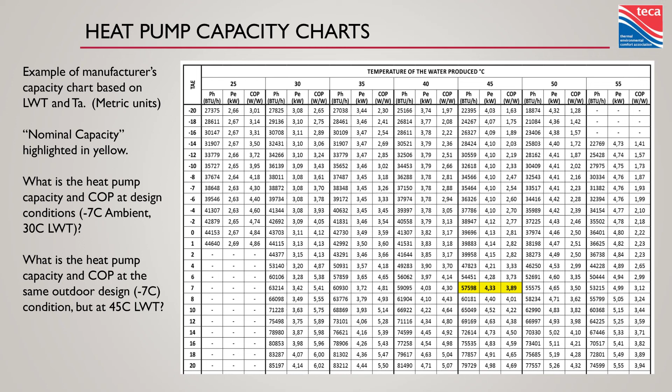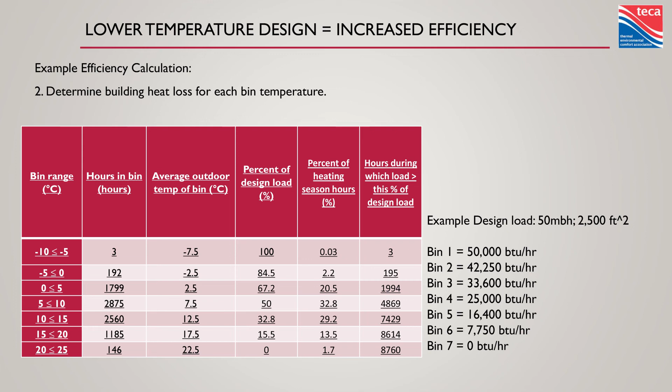But let's say we take that heat pump and put it into a house. We've got a bin temperature chart, we already covered that. So let's start figuring out how we heat that space. Let's say it's 50,000 BTUs, 2,500 square feet. We can look at all these different temperature bins and figure out just how many BTUs we're going to need for each one of those bins. And we can pop over to a heat output chart for radiant floors, and we can see for each of those bins, what water temperature do I need? So now, bin 1, the coldest time, our design load, needs 92 degree water. Meanwhile, bin 4—not the burger joint—only needs 83 degree water.

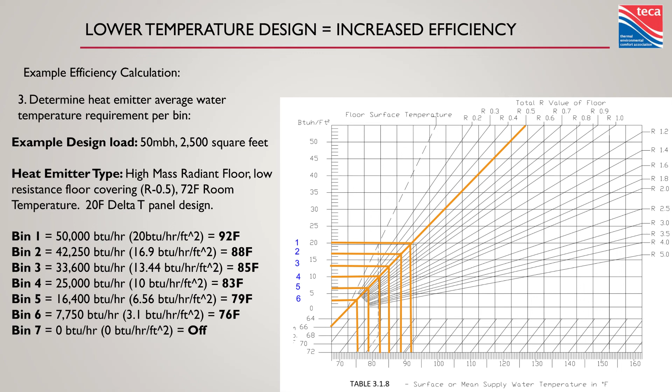So that's where our outdoor reset control strategy really shines. We're getting more capacity from the heat pump, more efficiency from the heat pump, just by dropping that leaving water temperature. So then we can go to this heat pump chart, take a look at each one of those bins: how much capacity do I have at that outdoor temperature and that corresponding leaving water temperature? And we can start plunking some numbers in.

Look at this—32% of the year, I've got 520% efficiency because I only need 93 degree water to heat that space, since it's 50% of the design load. 29% of the year, 545% efficient. Huge numbers, much better than what's on the rating plate, certainly better than the number at the design condition, but these are the largest parts of the year. So you could then take that by the number of hours, start running some numbers on what you pay for hydro, and you can start figuring out what this is going to cost to operate.

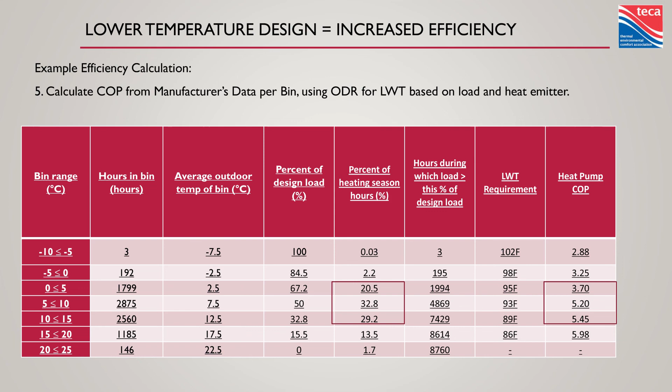Without those steps, you're just blindly hoping this thing is going to work. But a big chunk of that year is partial load conditions. Outdoor reset, air source heat pumps, great friends.

So what's the break-even point? Everybody loves this question: natural gas versus electricity. Today, on step 2 and what we're paying for gas, a COP of 6 is probably going to be the break-even with a 90% combustion efficiency appliance. Step 1 is going to be more like a COP of 4. But that's going to change. Our electric rates are going to change, our gas rates are going to change, technology is going to get better. This is just the break-even point against what's said to be the cheapest way to heat right now.

Compared to oil, compared to propane, compared to an electric boiler, this is going to save money quick. And it's going to save more money as those gas rates go up and get taxed more.

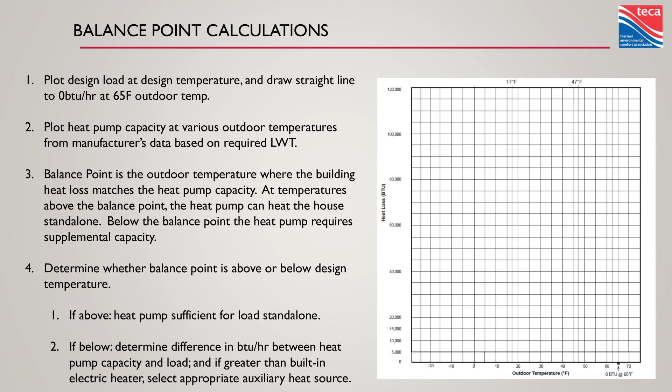Last thing I want to talk about is balance point calculations. I mentioned this before - key part of any air source heat pump system. I just want to take you through it. Along the bottom of this I have outdoor temperature. On the left side is capacity. Here's a slide version of the output of a heat pump.

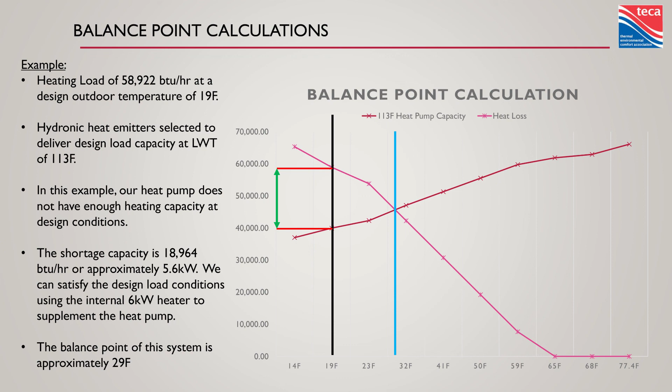We've got formulas to size them based on temperature difference in the tank, based on minimum zone load. Happy to go through all that in detail at a time when I've been given more time. But nonetheless, they look like this.

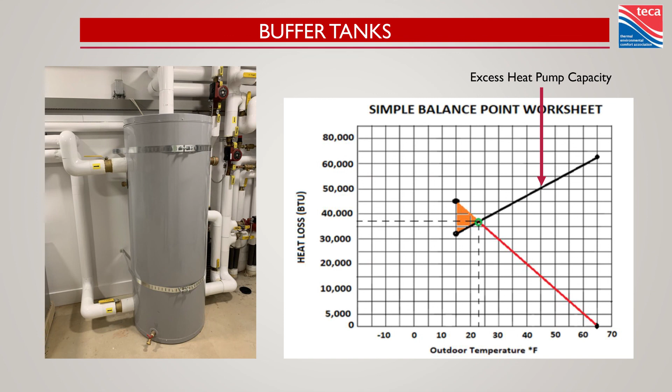It's a tank - there's lots of them on the market. They're insulated, but if you're running chilled water through it, make sure it has vapor sealed insulation. We don't want that tank to start sweating with the chilled water in it - it's going to rust, it's going to fail. I've seen them die in less than 2 years. So make sure you're picking the right kind of buffer tank if you're doing heating and cooling with these systems.

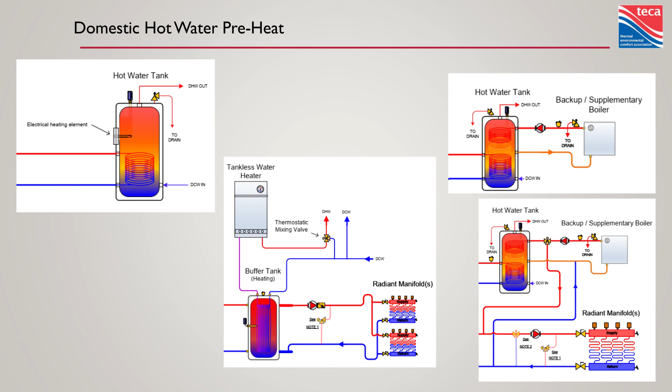So there's a lot of different ways to preheat domestic hot water and top it up with another heat source when we're dealing with hydronics. We spell all that out in the course and in our piping handbook. Looks something like this - if you've seen a hydronic piping diagram from TECA before, not much different.

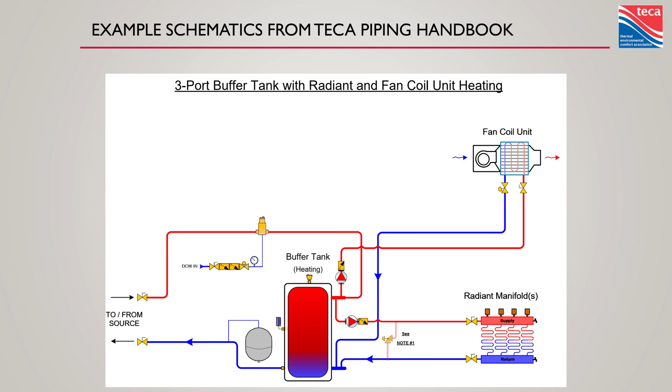This is a split air-to-water heat pump, and this is what the load piping might look like - a fan coil and radiant floor heating off a 3-port buffer tank. We've got a whole library of these kinds of drawings coming out: different configurations, diverting to a fan coil for cooling, radiant floor heating, fan coil and radiant off a 3-port buffer tank. We've got heat-cool buffer tanks with multi-fan coils and backup boilers - it's real fun stuff if you're into this.

So just a taste of what's coming out soon. We've got so many drawings, it's kind of absurd.